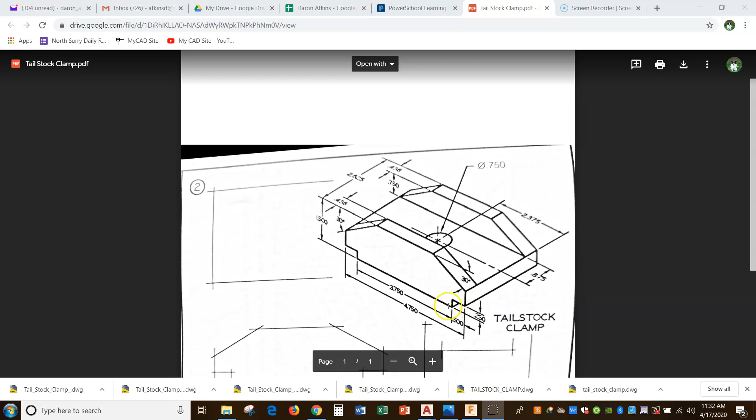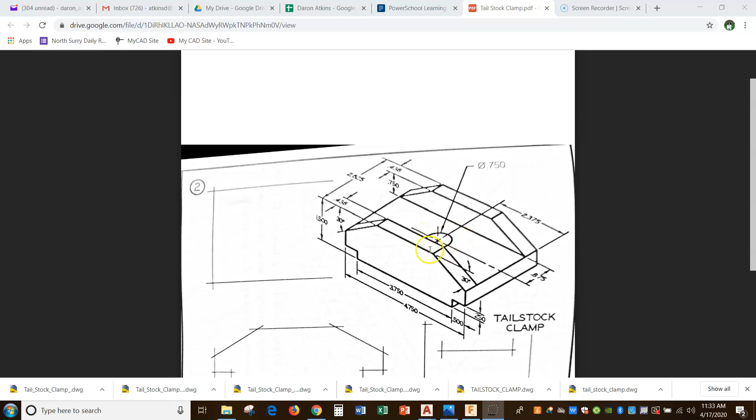The reason why, as you can see here, from the front we can see these notches, which are 1/4 of an inch tall and 1/2 of an inch wide. The entire piece is 4 3/4 wide. And we can see these angled cuts from the front. We have to draw the right side so we can see this channel, this slot cut through the object. We have to draw the top view because of the hole that we've got. So that's the reason why you need 3 views.

So when we start laying out our drawings, we need our front view, which is 4 3/4 by 1 1/2. There's our overall height. Our right side will be 1 1/2 tall by 2 5/8 or 2.625 wide. So that's going this way. That's our depth. So we've got 1 1/2 tall and 2.625 deep. And then our top view will be 4.75 wide and 2.625 deep. Remember, we're going to put 1 inch between the view here and 1 inch between the views here. Okay, so let's get started.

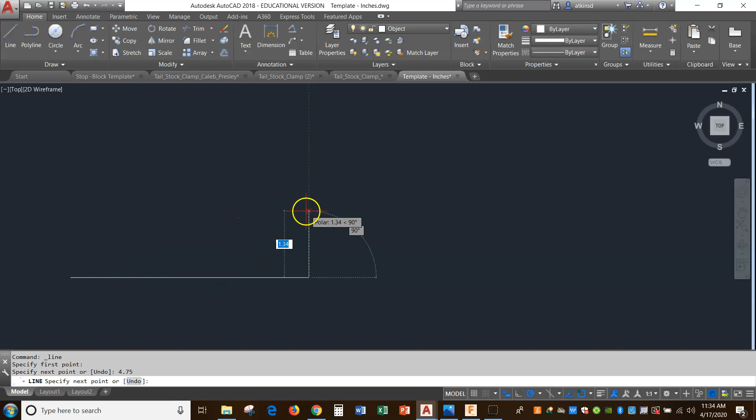So our front view is 4.75 by 1.5. So we start with a line. We're going to come over 4.75. We're going to go up 1.5 because it's 1 1/2 tall. Then back over 4.75. Remember, I can hover or I can type in my number, whichever I prefer. So there's my front view box.

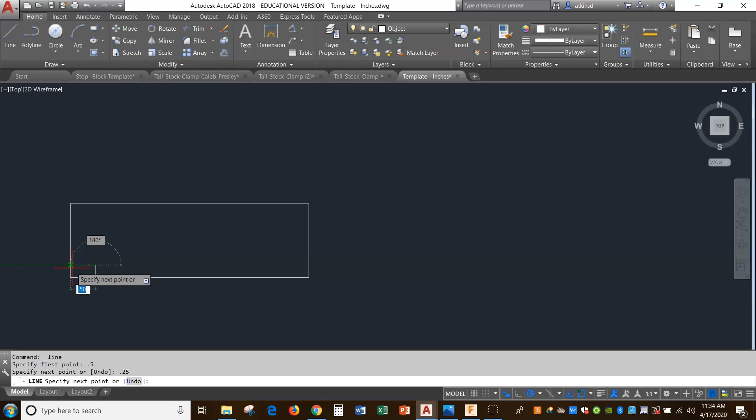Now the cutouts down here at the bottom on the front view, if we go back and look at it, they are 1/2 inch wide and 1/4 of an inch tall. So let's go back and do that. So we're going to go into line, we're going to hover. Now notice I am drawing in the object layer. I'm going to hover, I'm going to drag over. Notice I didn't click. I'm going to drag over 0.5 and let that be my first point. And then I'm going to go up 0.25. And then I'm going to come back 0.5, which gives me back to the intersection or the X. Okay, so there's that cutout on that side.

I can draw the exact same thing over here, or I can use the mirror command, select these 2 lines, and hit enter and use the midpoint of this line and then come up and click again as my mirror line. And then no, I do not want to erase my source object. I want to keep it. So there's those corners. Now we can trim these out or we can use the grips, either one. If we use the grip, we would click on the line, click on the blue grip and drag up, then click on this line, click on the blue grip and drag over. Then we would hit escape.

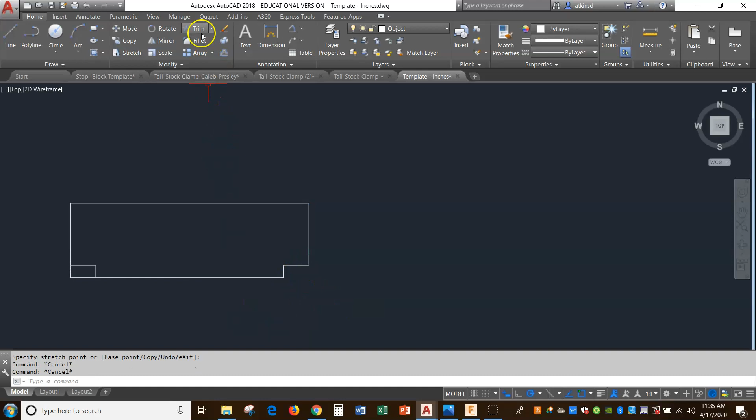Or we can do the trim command. And remember, in the web app, all you have to do once you hit the trim command is just touch what you want to get rid of and click on them. In AutoCAD, what we have to do is we have to say trim. I'm going to use the select all down here inside the less than or greater than by hitting enter. And now anything that I pick will be trimmed out because it selected everything as a cutting edge. So there's my front view as far as my basic stuff goes so far.

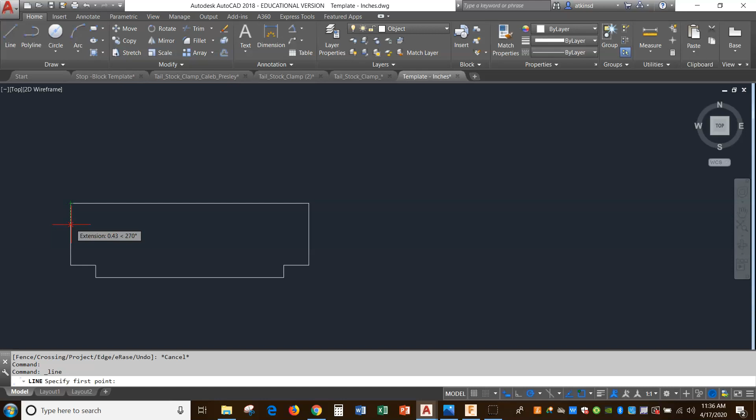Now let's go back and look at our drawing again. These angled cuts here, these 30-degree angled cuts, come off of this platform. So they're located 3/4 of an inch down from the top and then rotated 30 degrees. So let's go in and do that. So I'm going to go into my line command. I'm going to hover here. I'm going to drag down, and I'm going to type in for my first point, 0.75.

Now, I could draw a line at any length that I want and put in an angle. I'll show you how to do that. So let's just arbitrarily pick a distance of 2. And then I'm going to hit the tab button, and now I'm going to set my angle at 30 degrees. And there it is. So that's one way of getting that.

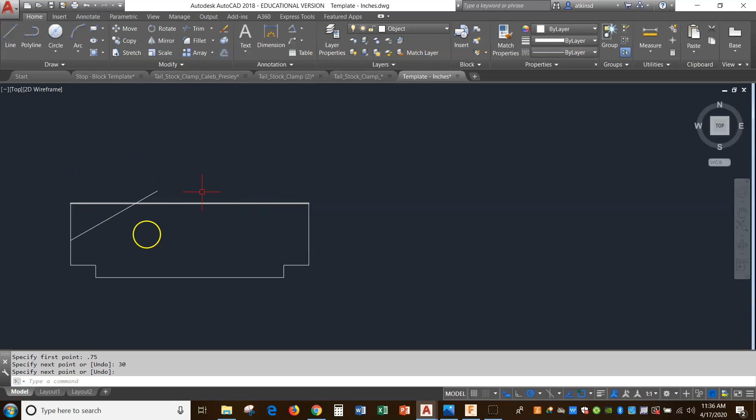Now I would have to trim this or stretch it back. If I hit the trim button, pick this as my cutting edge. Remember, in the web app, it's automatically everything selected. And then click this to get rid of it. So that's the way you would trim that out. Okay, so that puts that in the right place.

Now the other way of doing it, sort of the old-fashioned way of doing it, if I hover here and drag down until my first point is 0.75, what we used to do is we used to draw a line out and just draw it at any length. Then we would go to rotate, highlight this as the object we want to rotate and hit enter. Then we would click on our base point, which is the point we want to rotate from, which would be here.

Now we're wanting to rotate this way, so we're rotating to the right. Remember, when you rotate to the right, that's negative degrees. Clockwise, so that's going to the right, is negative degrees. Counterclockwise, we're going to the left. So if we're going this way, it would be positive degrees. So I'm going to put in negative 30. If you notice, I've got the negative sign in there, and hit enter.

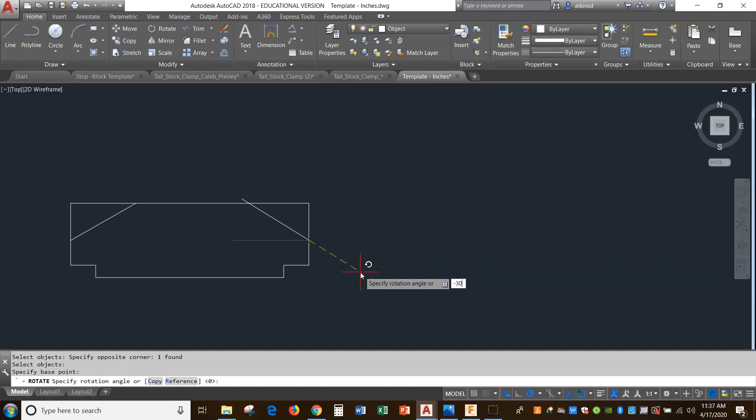So there it is. Either way you want to draw those lines is fine. You can mirror it once you get it drawn correctly. Again, I would go into trim now and trim this out. And while I'm in trim, I can get rid of this and this. So there's all of my object lines from my front view. I'm done with that, okay?

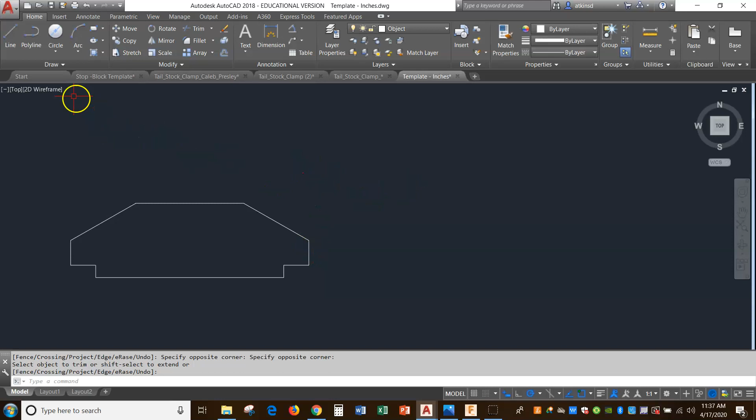Now, the next thing I need to do is start my right side. I need to be an inch off of this edge here because that's my furthest edge out. So I can start a line. I'm going to try something here. I'm going to hover here, and I'm going to hover here. I'm going to come across. And see, that says that's where I want my first point. No, not really. So the best thing to do in a case like this would probably be to use the offset. Tell it your distance of 1 inch. Offset that 1 inch. That way it's 1 inch away.

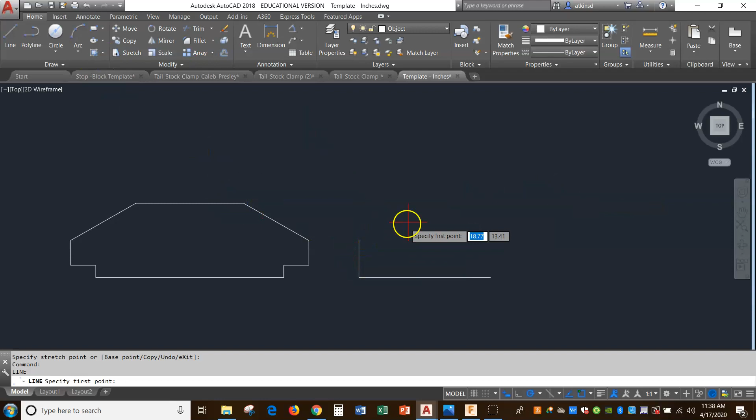Now I can hover here, drag across, come up here and hover and drag down. There's my point. Okay, and this object was 2 5/8 deep. Now I'm going to type in 2.625 for 2 5/8. Okay, now I can take this line and bring it on down to where it needs to be. Okay, so there it is. Now this line needs to be the same height this line is. So again, I can take this line by the blue grip, drag up, come up here and hover over this point, and come across, and now that line is the right length.

I need the very same line on the other end, so I'm just going to copy it. I'm going to copy it using that base point, the end of the line, to there. Okay? Now, there's my start of my shape. I could go ahead and draw my box. Remember, you're supposed to always start with a box, but a lot of people will just draw the basic shape. So I could start with this and then trim out what I don't need. This is usually the easiest way to learn how to do this.

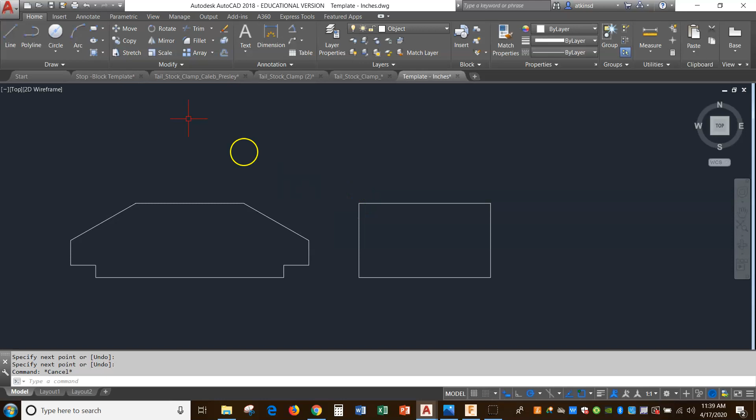So let's go back and look at our dimensions again. What we've got here now is this platform, which is 3/4 of an inch down from the top, and then we've got this notch here. So we're going to see a rectangle all the way across the bottom, another rectangle here, then 2 rectangles going up representing these sloped surfaces. So let's go in and see what we've got with that. So I go in my first line, if I hover here, drag across and click, and then drag across, there is that line.

Okay. Now I've got another line. If I hover at this point, drag across, and you need to be careful here because it's wanting to go to the center point. You might want to do this so you don't accidentally grab the wrong point: just click here and let's drag straight across and make it extra long just to be safe. Now we can go to trim and hit enter and trim this out and trim this out. Now we know we've got it at the right location.

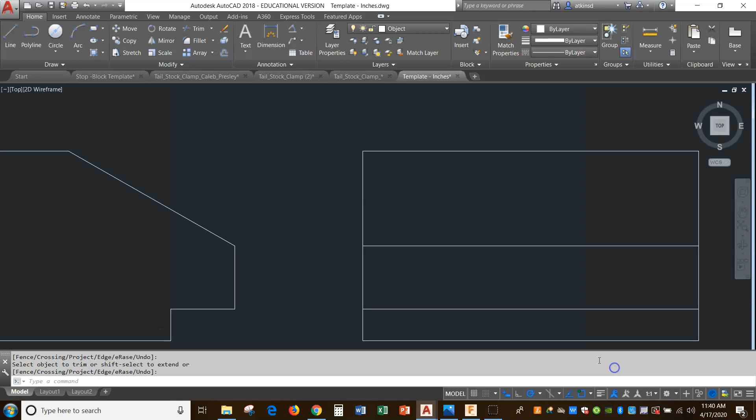If we go back and look at our object again, these pieces are 0.438 wide. It's actually 0.4375, but we will use the numbers that Dave gave us here so we can keep it easy for your drawing. So I'm going to say line. I'm going to hover here at this point, drag across, and type in my first point, 0.438 away from that corner, and then come down.

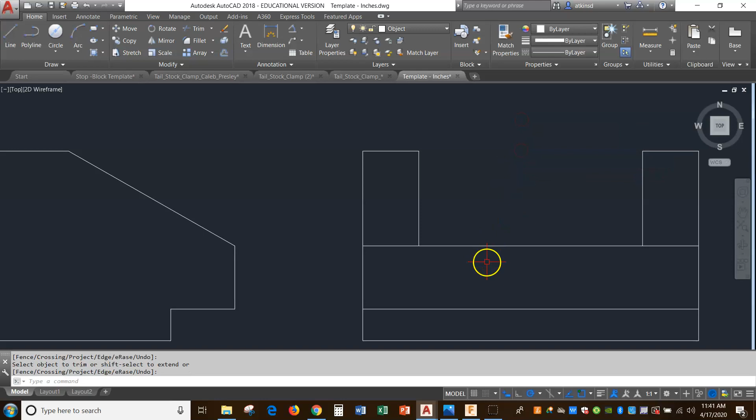There it is. Now I'm going to mirror that line, hit enter, use the midpoint of any of these lines, but this one's fine. Drag straight down, click. No, I do not want to get rid of my source objects. Now that's in the right place. I'm going to use the trim command, and I'm going to get rid of the part in the middle. So there are my object lines, my visible lines in my right side view.

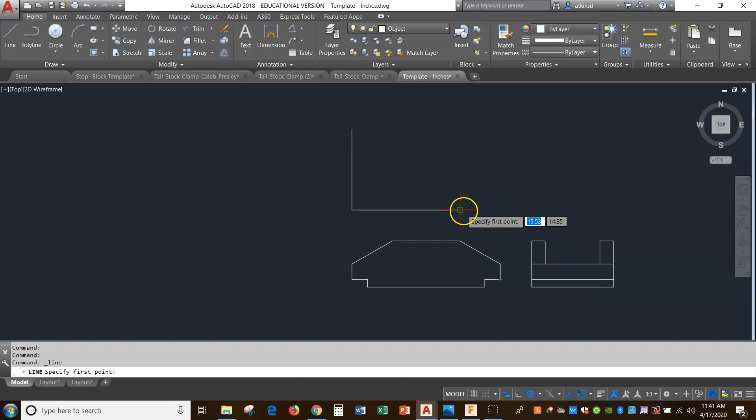My top view, again, offset 1 inch, up 1 inch. And then my line, I want it to start, my box is going to be here. I'm going to hover here and here and click there. And again, we're doing depth just like we did in the right side, 2.625. So there's that line. Now let's extend this over to the edge. Okay, there we go. And then I've got another line here. So I'm going to start it here. I'm going to hover and hover and give it my first point. Click, there it is. And again, 2.625.

Take this line all the way back, and now I'm going to take this line and stretch it out to here. Okay, so there's where my top view is going to set. Now, remember, we can use the miter line that we talked about if we've got a construction line drawn.

I don't have a construction layer here, so I'm going to create a layer again to show you how to create a layer. If you go in, click on New Layer. I'm going to call it Construction. You don't have to do this. You could actually use the layer you're in, but I'm just doing this so you can see it a little bit better because I want it to show up. So I'm going to hit OK.

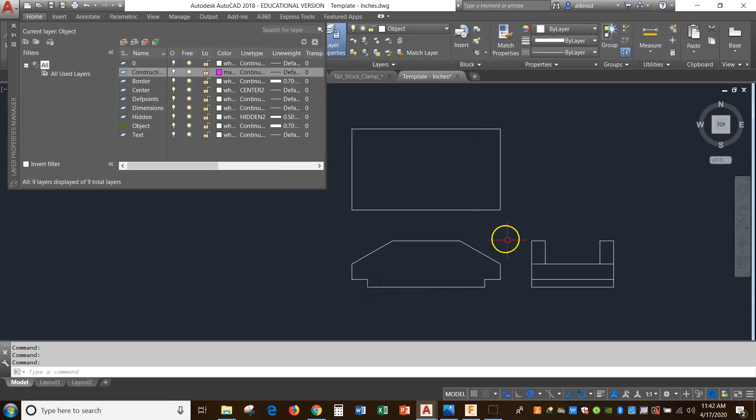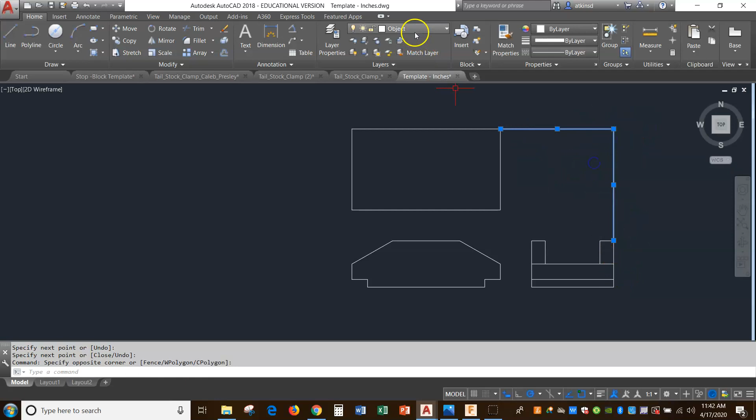You do not have to create this layer to do this. You can do it in the very layer you're drawing in. So I'm going to go Line. I'm going to click on the end point of this line, click on the end point of this line, because the back of the top view and the back of the right side are my outside edges. So this edge is the back of the object, this edge is the back of the object. Now I've got me two lines there. And again, I would have these on my construction layer if they were mine. You can do them on the object layer, it doesn't matter.

Now I'm going to draw me another line here, and it's going to be at 45 degrees. And again, I'll put this on the construction layer just so you can see it. So now, if you notice, this edge goes to here and hits the 45 and comes down. Notice this. This edge goes up, hits the 45, and look, it hits right there. So this depth is the same as this depth.

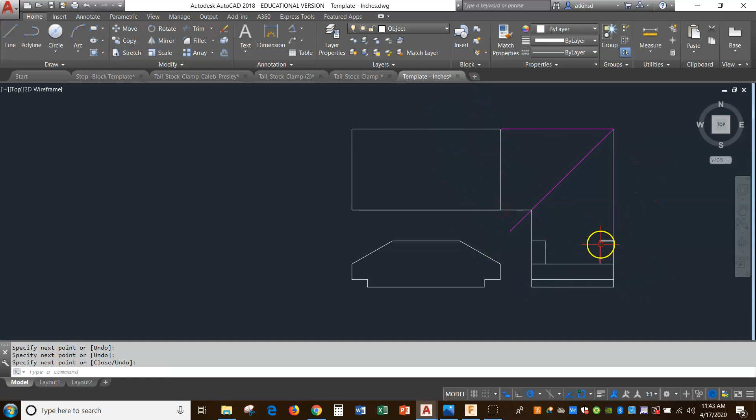So by doing that, I can go line, click, drag up, hit there, drag all the way across, because this goes all the way across. Do the very same thing for this edge. Click, come up till I intersect, drag across. So there are those two upright pieces.

What am I talking about? These two pieces here that's standing up, that whole section there. And then, of course, I can either trim or I can drag these over and get them in the right place. Okay, so there's that. That's what you've got to do. That makes it really easy to do that. We're going to leave this miter line here for a minute because we're going to be able to use it here in a minute. I will delete these lines just so they don't get in our way.

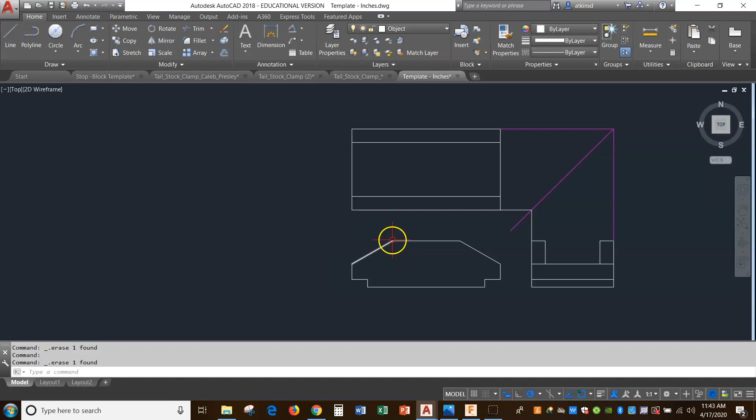So now the next thing we need to do is the tops of those angled pieces. Well, I'll go to line, hover here, drag up and click, drag up and click. There's that one. Now, I can do this a couple of ways. I can either mirror it, I can draw it, or I can copy it. I'm just going to draw it this time. Click and click. There it is. Pretty simple.

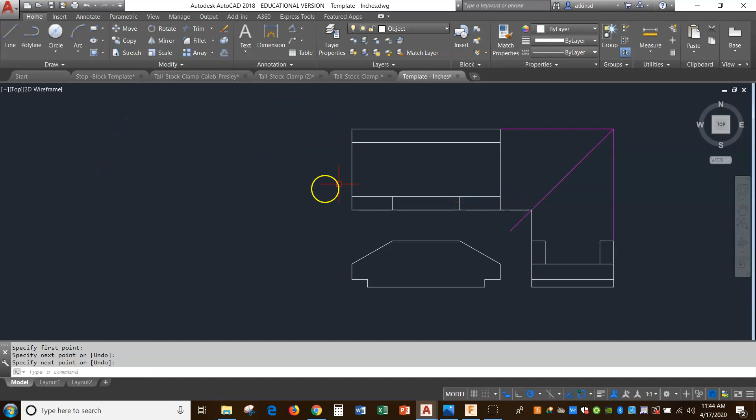This time I will copy. I'm going to go to copy, and I'm going to copy both those lines. I'm going to use the end of this as my base point. I'm going to go to here because they're the same width, and there's those. So there's my slope, there's my slope, there's my slope, there's my slope. And that point lines up with that and that. Okay? So that takes care of that.

Now the only thing we've got left to do is put the hole in this object as far as being visible. So the center of this hole, if we go back and look, 2 3/8 in, and from the inside edge of the upright, it's 0.875 or 7/8. So it's 2 3/8, 2.375 in, and 7/8 in from the inside edge of the upright. So let's go do that.

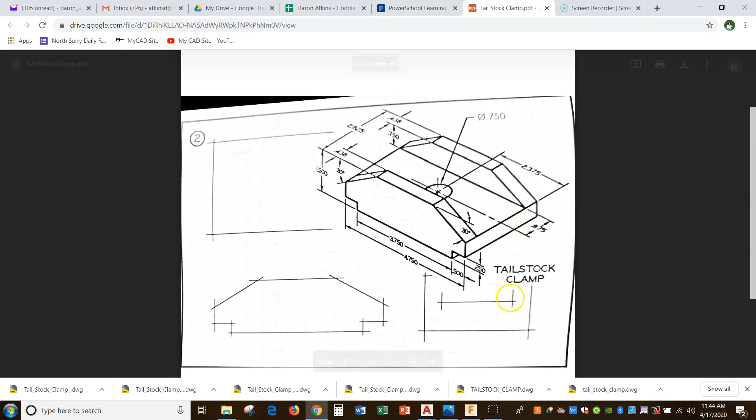So I'm going to take a line, and I'm going to hover over my midpoint here, and I'm going to drag down, and I'm going to say 0.875 or 7/8. Okay, ooh, I accidentally hit the undo button. So let's do it again. Click, drag down, 0.875 and hit enter.

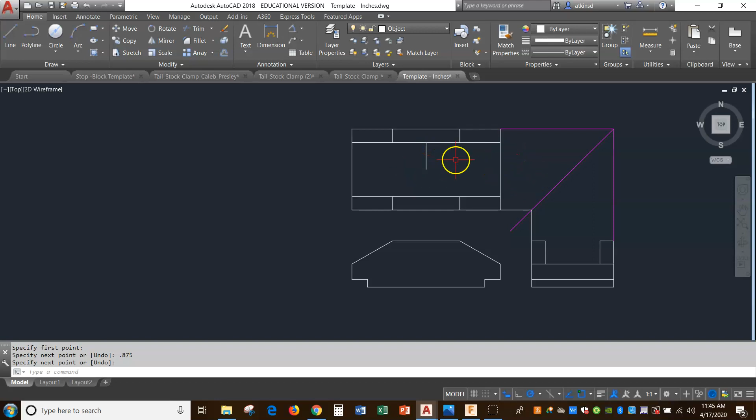Okay, now remember, it's supposed to be 2 3/8 in, my fault, 2 3/8 in. I think that's where it's at, but I'm going to use my measure tool just to be sure. I'm going to click here, I'm going to click here, and it says 2.375. The reason why we're getting that is because of the distance that we drew originally. So we're good here, okay?

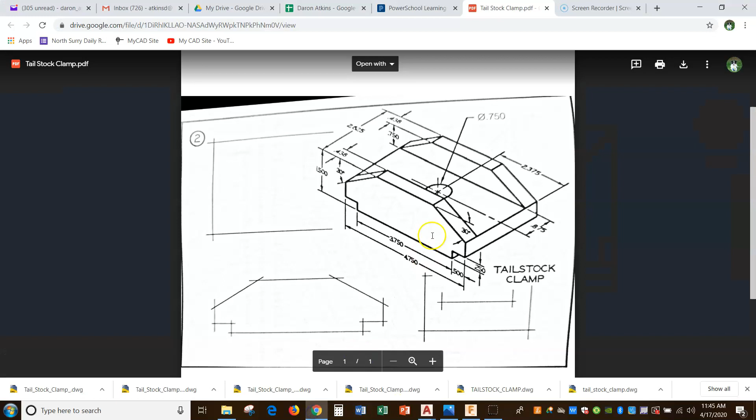We're going to leave it where it's at. So now let's go to diameter. That hole is 3/4 of an inch. Sorry about that, I clicked on the wrong thing. Okay, so there's my center point. Drag out, say 0.75. There we go, okay?

Now we need a center line for this hole. I'm going to delete that, and I'm going to do this because of what happens in the web app browser. We could do it using grips in just regular AutoCAD, but I'm going to do an offset of 0.25, and offset this circle 0.25.

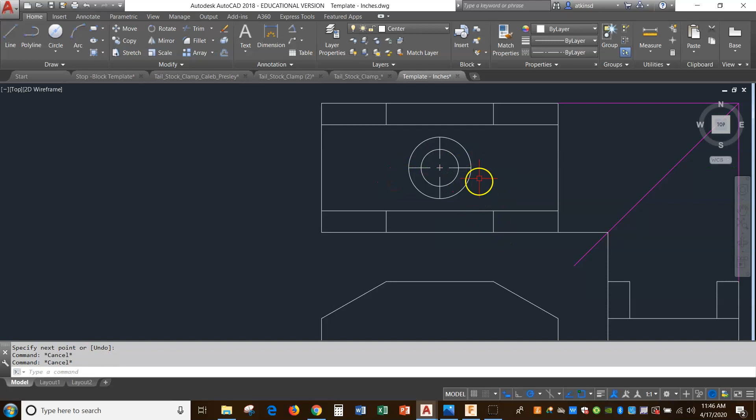Now I'm going to change to my center layer, and draw a line from quadrant to quadrant. It's just as easy to do it this way, or I can mirror it quadrant to quadrant there. So there's my center line. Now I can get rid of that circle. So there's that circle drawn.

Now I need hidden lines. So let's go draw hidden lines. When I go to hidden, make my hidden line, now I'm going to go to line. We can't see this notch in the top view, so I'm going to hover here, drag up and click and drag all the way to the back. There's that slot represented in the top view. And I have to do the exact same thing over on this side. Okay, so that's represented. We're good there.

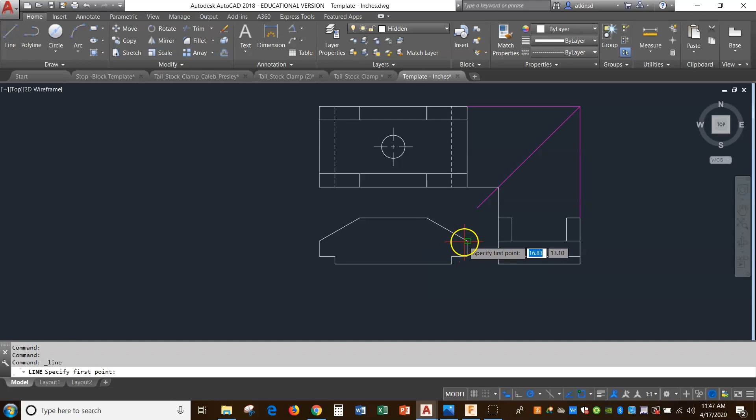Now we can't see this platform in the front view, so it goes from corner to corner. There's that. So we're good there.

Now we can't see the hole in the front view or the right side. So let's go to line, hover over the quadrant, drag down, and remember it starts here at the top of the platform and goes to the bottom. And then we've got another one that shows the other quadrant of the circle, here to here. Okay, so that's how we would get that there.

Now we need our center line to show that this is a circular feature, and you would only put one vertical center line. Now notice what I'm going to do here. I'm going to use that offset command again because, like I said, in the web app, it's the easiest way to get it. I'm going to go to line, center of that line, which is where I'm at up above, down to there. That's where it goes. And notice that line is on the hidden layer.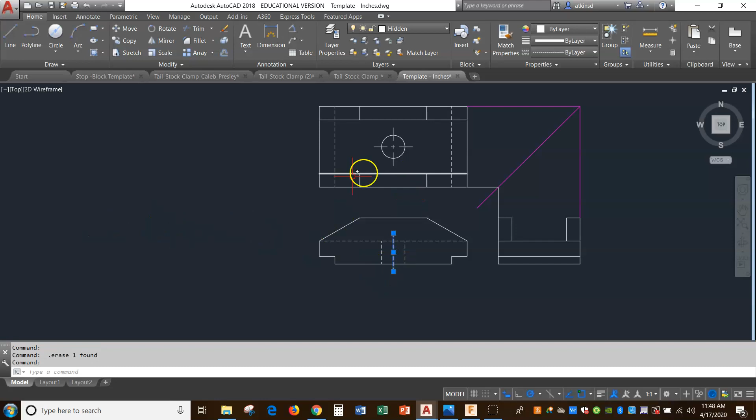In the web app, all you have to do is click on the line, go to properties, and change it, and that'll put it on the proper layer. Let me get my properties up here. So if I click on my properties box and open it, if you notice, this is sort of what you see in the web app. A lot of times we don't have this open in AutoCAD, but it's a good thing to have open.

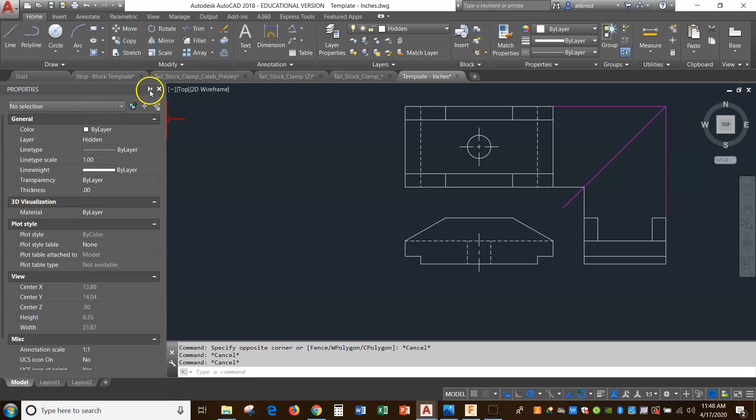So if we look here, my layer's hidden. If I click right here, and this is how you would do it in the web app, I can drop down and say change that to center. Okay, and that would take care of it. I'm going to hit escape. We can hide this by hitting the little box here, and it'll still be there, see? And then when I touch it, it flies open. Okay? So there's that for us.

Now we need this whole configuration here in the middle of this. Now the proper way to put that in its location is we would draw a line from the quadrant over. And again, you may want to draw it a little bit long because it's wanting to snap to the midpoint. And then we want to do a line from the intersection. Let's zoom in here. See what it's wanting to do?

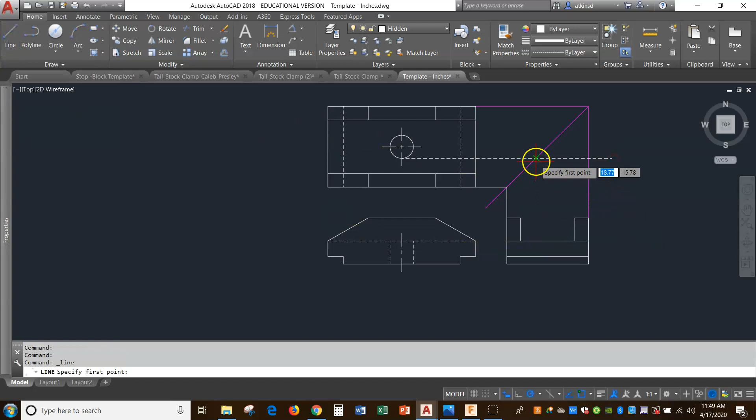There's the midpoint of that angled line. What we're after is that intersection, and we would draw it down to there. And then we could grab the grip and drag it down to here, and that would put it in the right place. We could do the very same thing for the center line and the other edge of the hole.

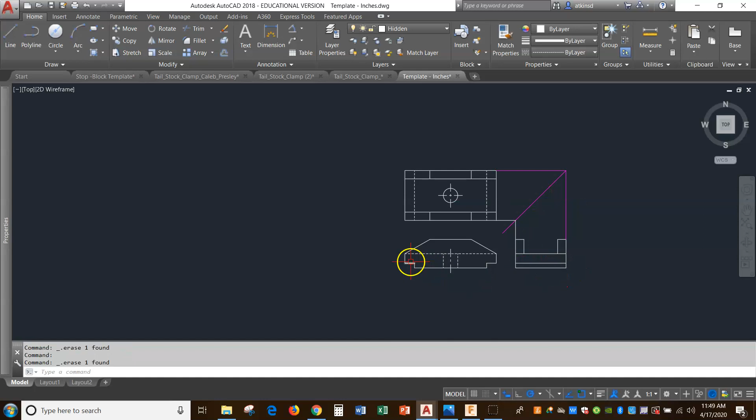The other way of doing it, I'm going to show you a way to cheat. Because we know that this hole is dead center left to right here, and it's dead center left to right in this view, I can actually use my copy command, copy those three lines, and I'm going to use the midpoint of that line there. That's the bottom line midpoint, and I'm going to go to the midpoint of this line. And it will put it exactly in the right place. Now I could check it back to this, and it should be right.

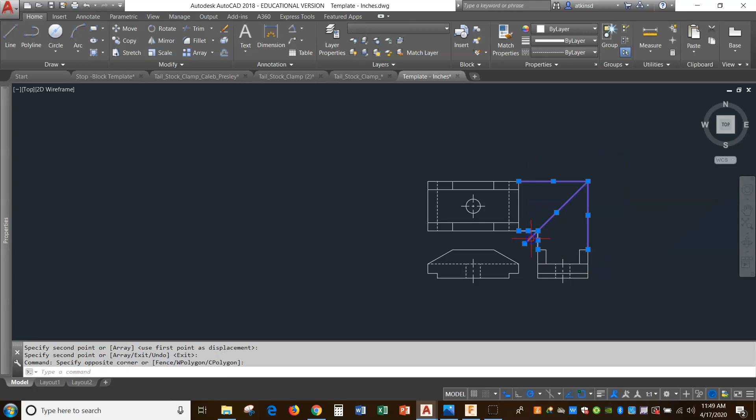All of these lines now can go away just by deleting. Okay, let's zoom in so we can see it. There is the three views of this object, and it's the right size. And every line is on the correct layer. We've got 1 inch between the views. That's measured from here to here. That's measured from here to here. Okay, so everything lines up the way it should be.

Notice our orientation. The top view, which is width, going this way, is directly above the top of the front view. It's from here to here. The right side is immediately to the right of the front view, and it lines up. Everything which is a height will be a height in both views.

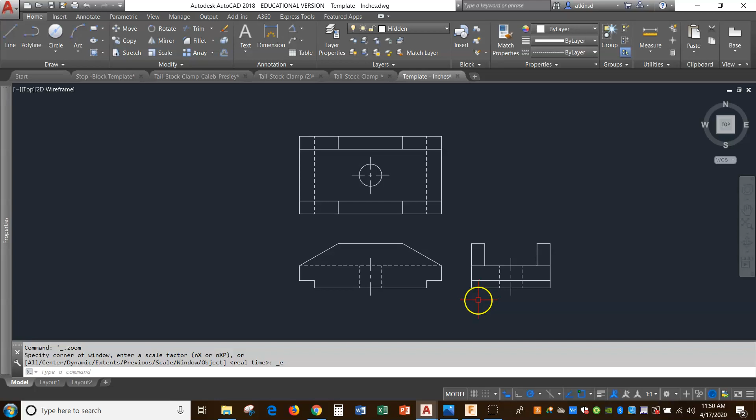So I hope this helps. Hope it makes a difference. And this should make it a little bit easier for you drawing multi-views. And this one, of course, is a 3-view multi-view. Have a great day.